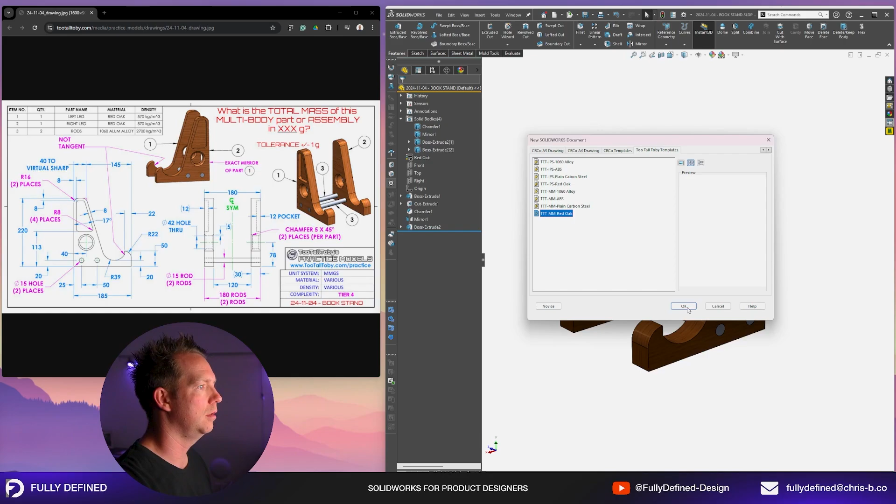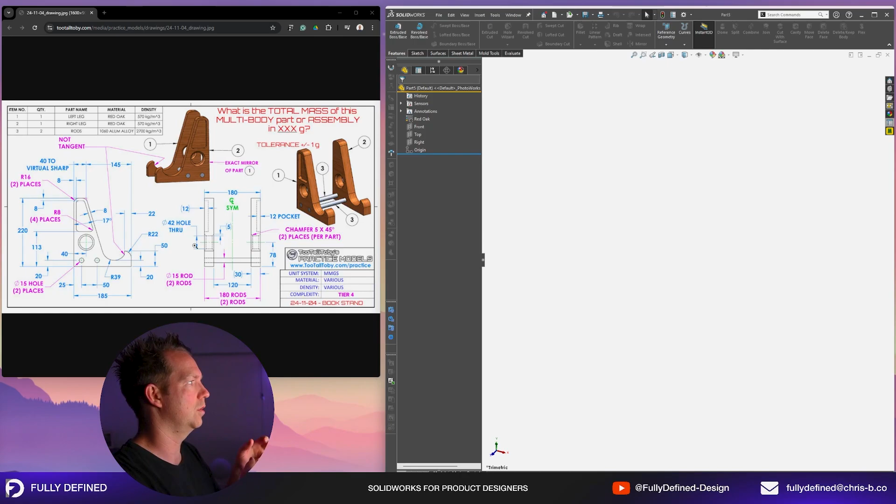And when I'm looking at this part, very quickly we can see that it's a duplicate. It's an exact mirror, part 1 and part 2, which means we only have to do it once in the model. So I'm going to sketch all the detail that we can see in this side view that we need to create the extrude. I'm going to then add some other details like this little recessed area, the chamfer. Then I'm going to mirror it to the other side, and then I'm going to put those 2 bars in, those rods, as the last step.

All right, let's go. So you could use front or right plane. And when I did this the first time, I used my origin as the bottom left corner. Makes a lot of sense, I think, because straight away we can add in the 220 and 185 millimeter dimensions. And we've got our rough size already fully defined there. And now I'm looking at this profile to create the shape around it. Now we're just going to sketch it.

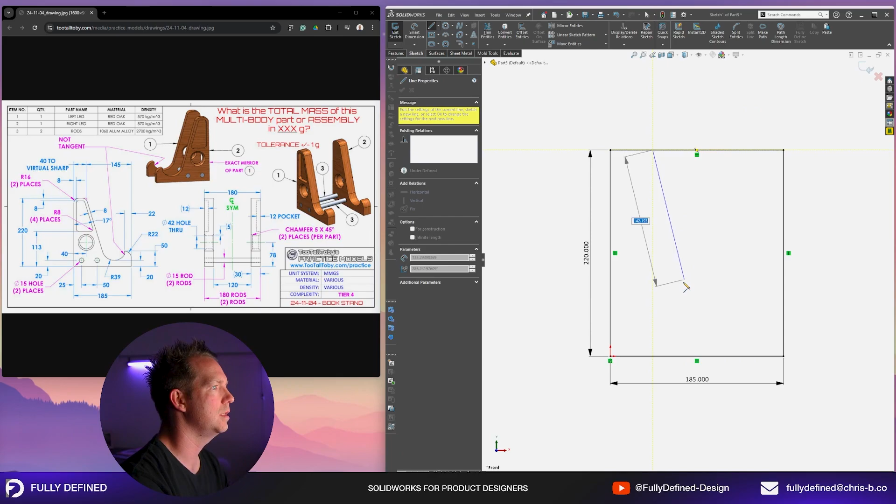The way I like to do this is sketch the shapes, try and get as many relations into that sketch as I can. So this, for instance, is tangent, and then there's a straight line up here, and then there's another tangent arc coming from the top. I'm just drawing that all in, and then I'm hitting my T key, which I have for power trim, to trim away, and now I can add the dimensions. So I can see this top section here, 40 to a virtual sharp means that this edge here is 40, and we can add the fillet in later.

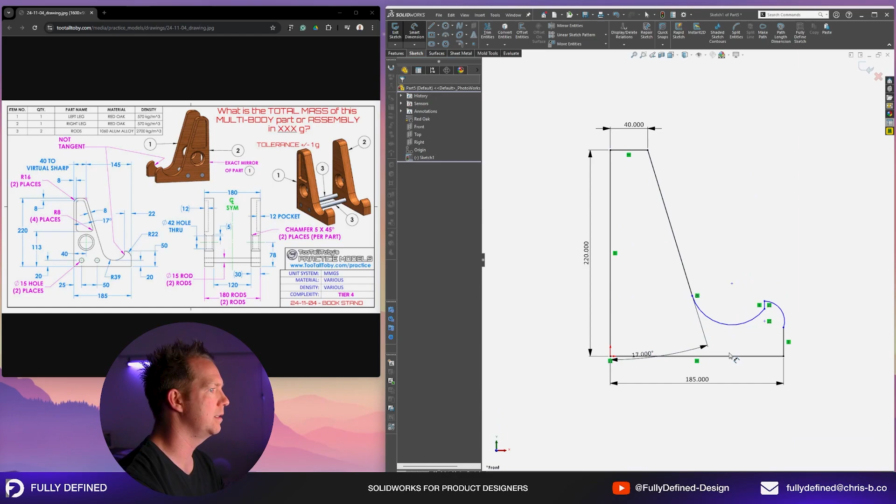The angle for these two, 17. The radius at the bottom down here, 39. And now I need to add this gap, which is 20. To do that, I'm holding the shift key when I click on the bottom of that arc. That lets me dimension to that actual edge rather than the center point of that arc. The radius on the outside, 22. The height of that point, 50. And then I just got to click this point here to make that tangent, and then I've got a fully defined profile.

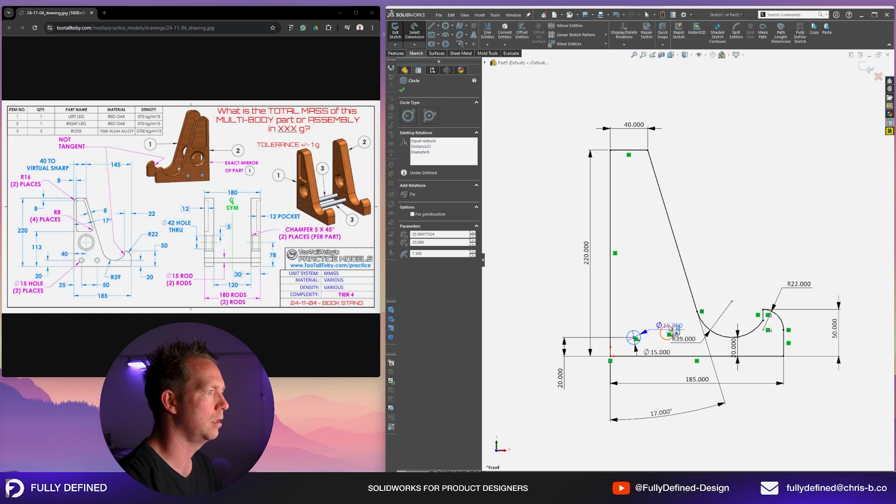Now the other details that I want to put in are these 2 holes at the bottom. So I'm going to sketch one of them. I can see that they're 15 in diameter. And I'll sketch another, but I won't add a dimension to that. I'm just going to make them equal. And then I'll add the dimensions to get them in the right position. And I will add a horizontal relation between them by holding Control, clicking horizontal to get them in the right position.

All right. Now, the other 2 details we have is the circle. On that drawing here, you can see it's kind of got 2 lines. Those 2 lines are indicating the chamfer that we can see. And the chamfer is detailed over here, 5 by 45 degree. So we're just going to draw the through hole, which is 42. So I've got my circle tool, put in the dimension 42, and add the dimensions to constrain it. So it's 40 from the side, and I can see here it's 78 from the bottom.

And then the last one is the shape at the top. We can see it's offset 8 mil from those three faces. So a very quick way to do that is to select these three outer lines. I'm going to hit offset entities, make sure select chain is unticked, and then put in my dimension, hit reverse to make it on the inside, and press OK. And then just draw another line to close it off and trim away the excess. Okay, and then we've got the complete shape. Add the dimension in on the side there.

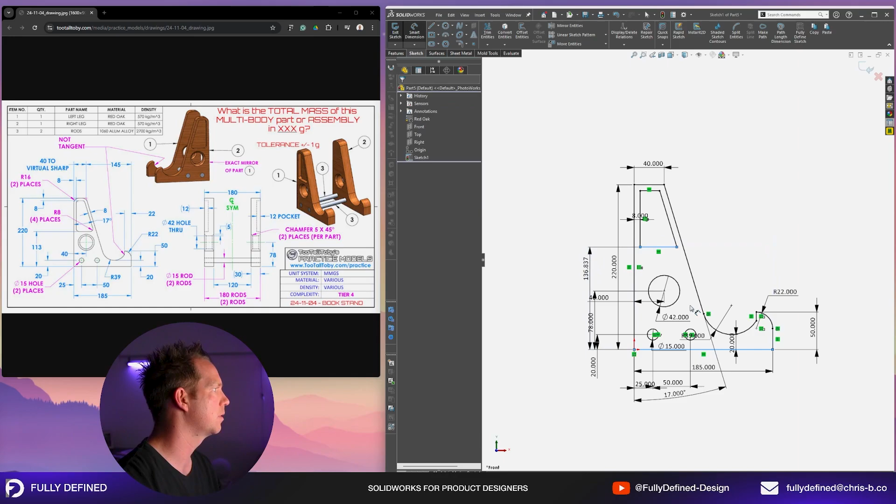And there's one step that I forgot in doing this, and I will undo just to bring you back, which saves a bit of time. The fillets around the top are actually concentric, so we should do the outer fillets first. So I'm going to put those two outer fillets in, and then I'm going to redo that process. So I've just done the offset again and selected those.

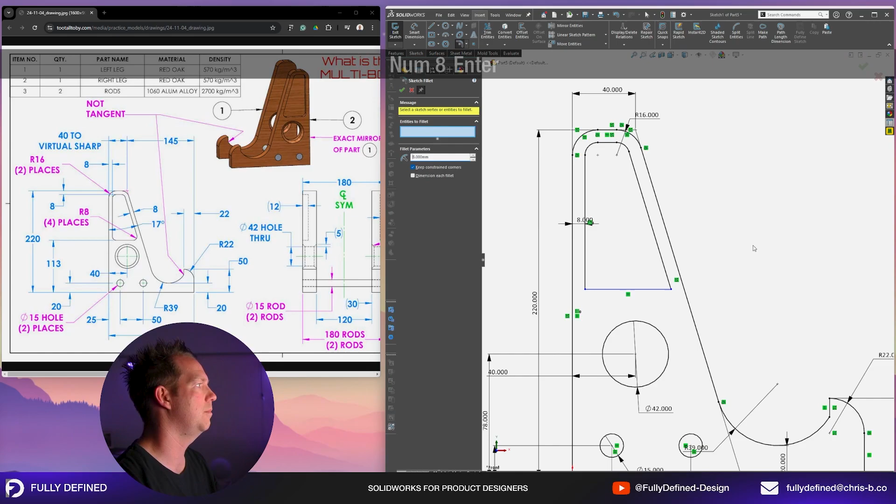This time, those two 8mm fillets are already in the top. I just have to add 2 at the bottom and the dimension to the bottom, and then the shape is done. That's the quicker and more efficient way to do it. Obviously, try not to make the mistake the first time around. Okay, so there's our fully defined sketch.

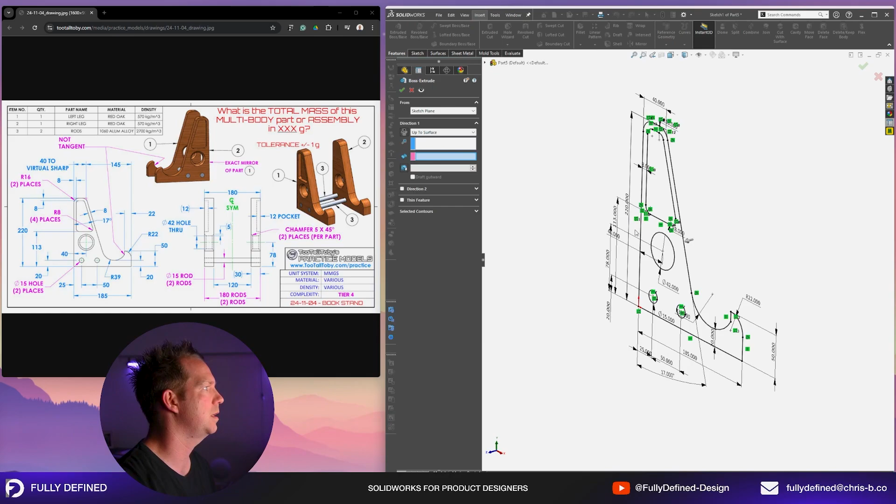Now we need to create the full width. The way I did this first time around was I extruded 30mm, which we can see in the brackets. So 30, and I'm going to offset this 60mm, which is half of the gap, so that when I mirror it later, the gap in between them is going to be that 120, exactly what we need.

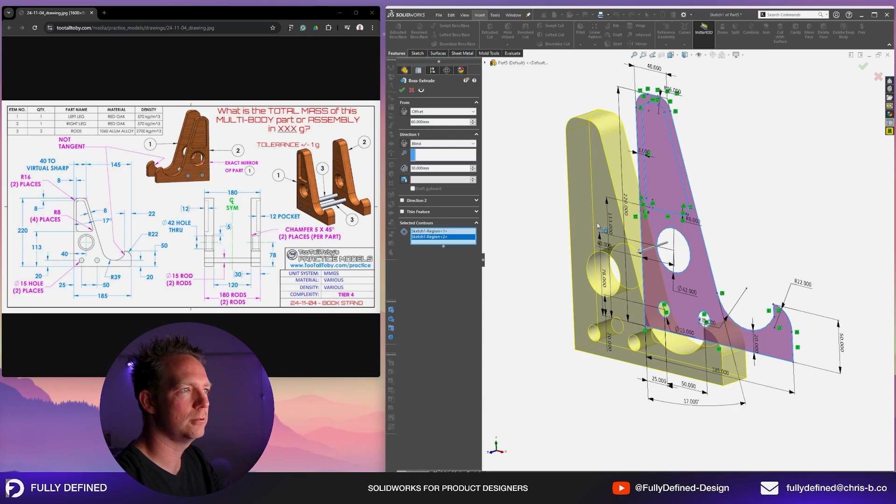The other thing I want to do is go down here to selected contours, and I want to include that thicker section. Now there's actually 2 ways of doing that. I could leave it out and do an extrude afterwards, or I can include it and then do a cut afterwards. The first time around, I did it like this, but maybe it'll be quicker in this method. So let's press OK.

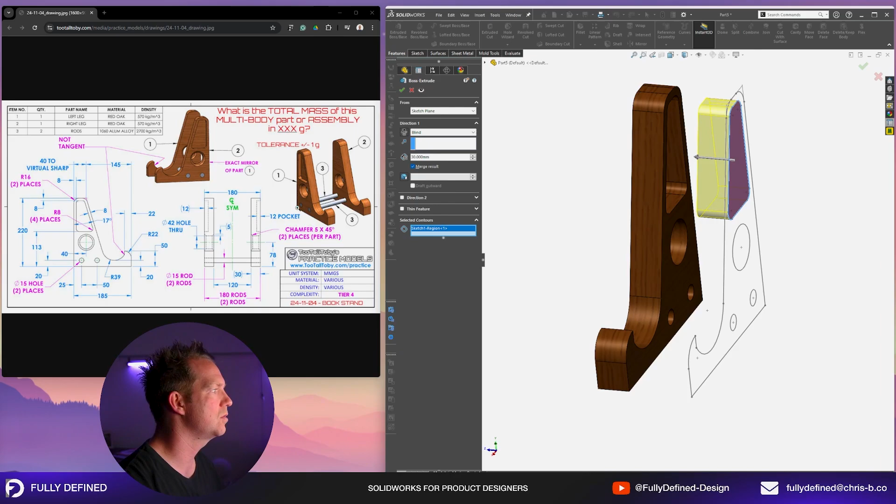And now we're going to use that same sketch again. So I select it, hit E for extrude. This time I'm going to select the contours, just that inner area. Now I want this to go 30 minus 12, so it's going to be 18. So from this face, I'm going to go 18mm. Okay, so that's now most of that body.

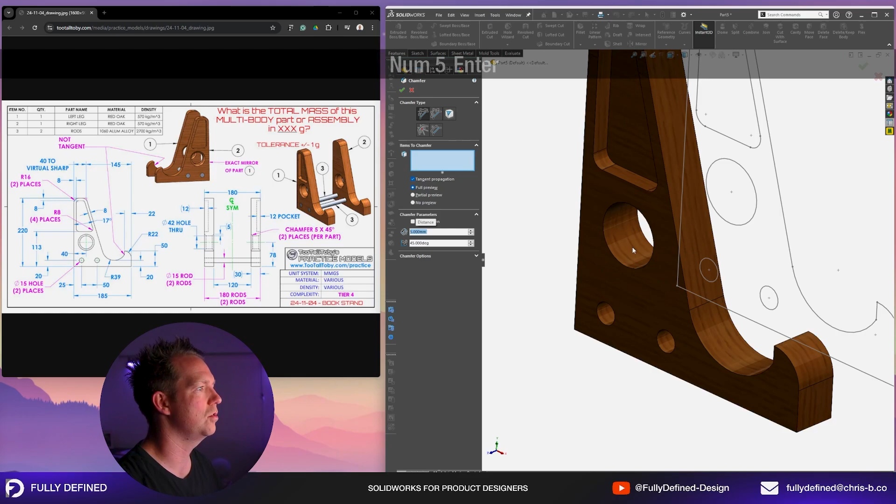But before we mirror, we want to put the chamfering. So I go to my chamfer tool, change the dimension to 5 and click on the internal face. A little shortcut if you didn't know for chamfers and fillets: if you are chamfering 2 edges, and those edges are connected with a face, instead of selecting 2 edges, just select the face, and it will do both at the same time. All right, so there's my first body.

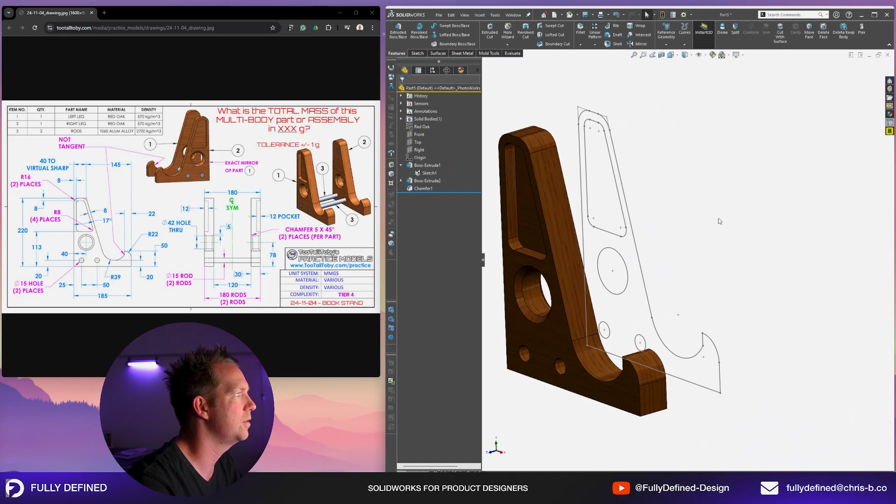Now I'm going to mirror that around the front plane. So hit front, hit mirror, bodies, uncheck merge, and press OK. And now I've got the 2 solid bodies on the outside done. My last step for modeling is to do the 2 rods going through the bottom.

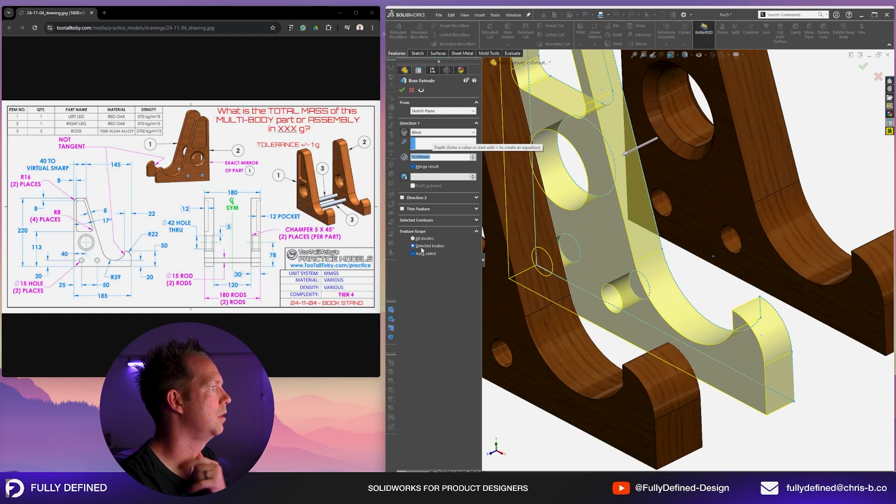For this, I'm going to go back to that first sketch and select those 2 circles. For direction 1, I'm going to go up to surface on the outside. And direction 2, I'm going to repeat the process and uncheck merge result. That's very important so that you retain the multiple bodies here and not merge it all into one body. So that's the end of our modeling.

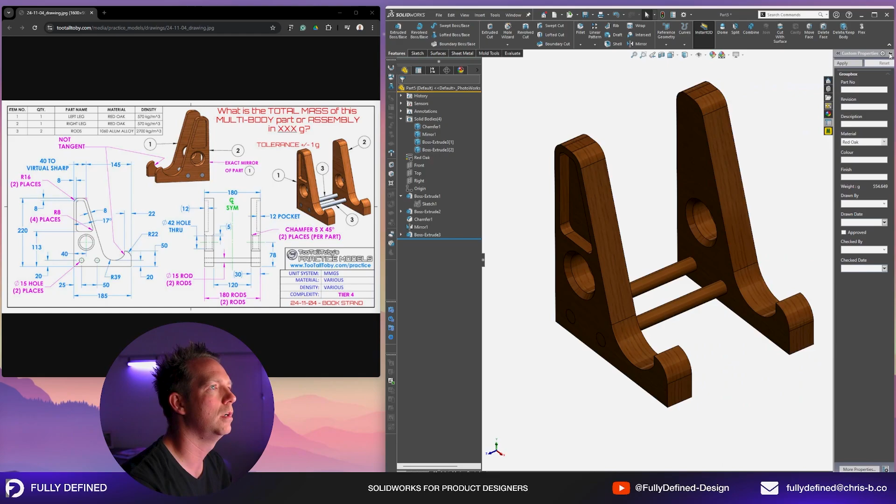Now to apply materials to a multi-body model in SolidWorks, hit the drop-down arrow on the solid bodies folder. All bodies here have the material that's already assigned to the file, which in this case is red oak. It's the third and fourth bodies here that we need to change. So I can select both of those, right-click, go material.

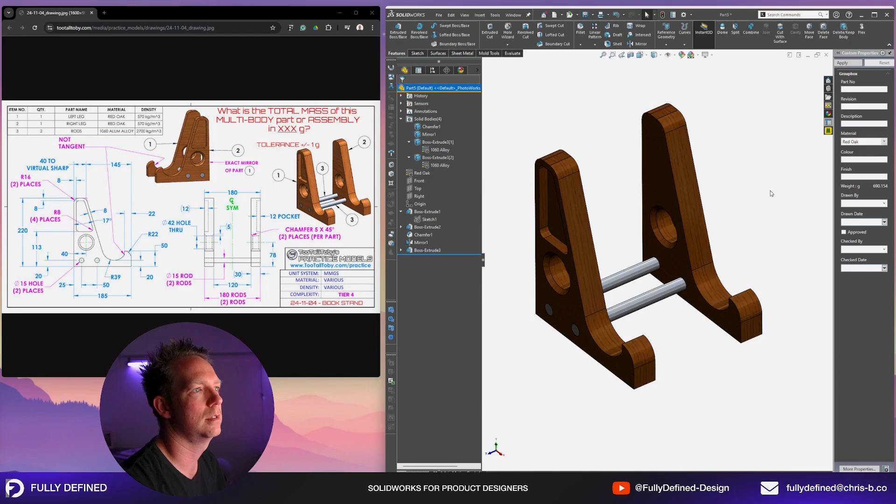And in my favorite materials here, I've got 1060 alloy. Clicking that applies that material to those bodies. And then we can see we've got our answer, 690, and that is correct. So there you go. Great little model.